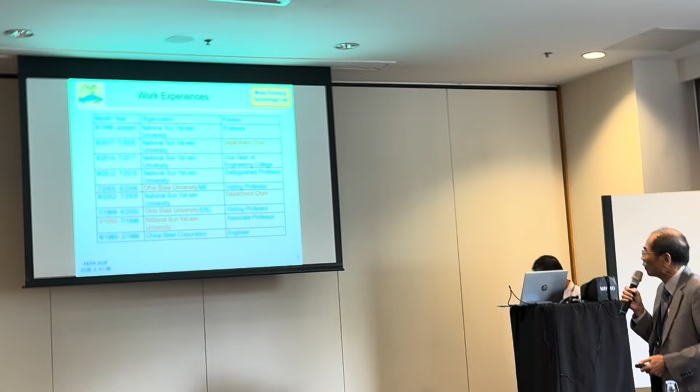About paper publications, I have 180 journal papers published and totally 220 conference papers, about half of which are international conference papers. I also got 32 invention patents or technology transfers, and published 6 books.

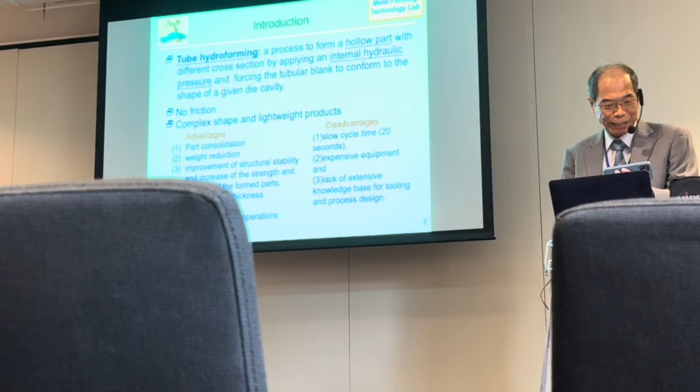What is tube hydroforming? Hydroforming can be defined as a process to conform the hollow part with different cross sections by applying internal hydraulic pressure and forcing the tubular blank to conform to the shape of a given die cavity. Because there is no need for an internal die in the tube hydroforming process, there's no friction at the inner surface of the tube, and complex hollow shapes and lightweight products are its features.

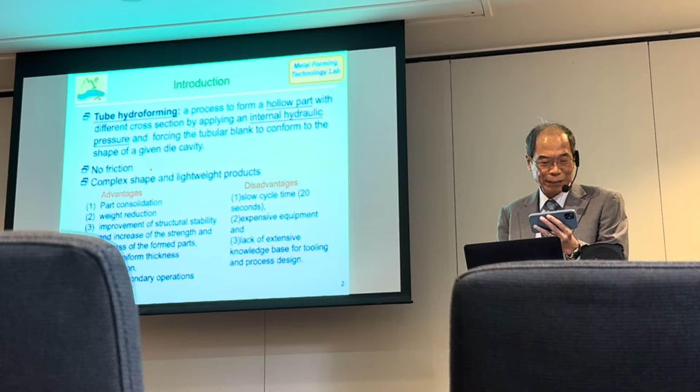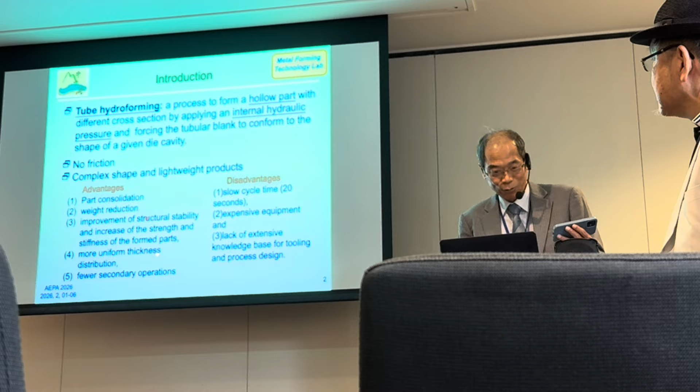Compared to traditional manufacturing via stamping and welding, tube hydroforming offers several advantages, such as part consolidation, weight reduction, improvement of structural stability, increase of strength and stiffness of the formed parts, more uniform thickness distribution, and fewer secondary operations. However, this technology suffers some disadvantages, such as slow cycle time, expensive equipment, and lack of extensive knowledge base for tooling and process design.

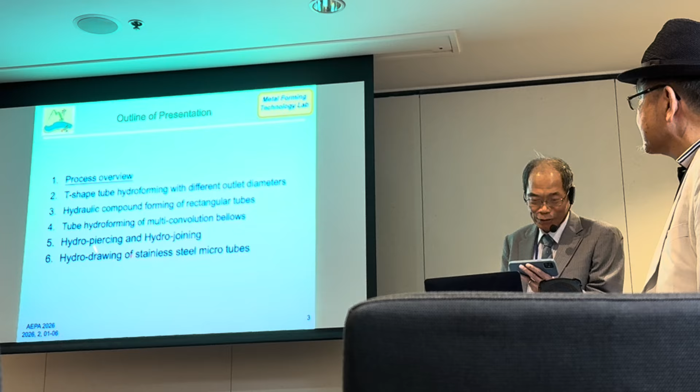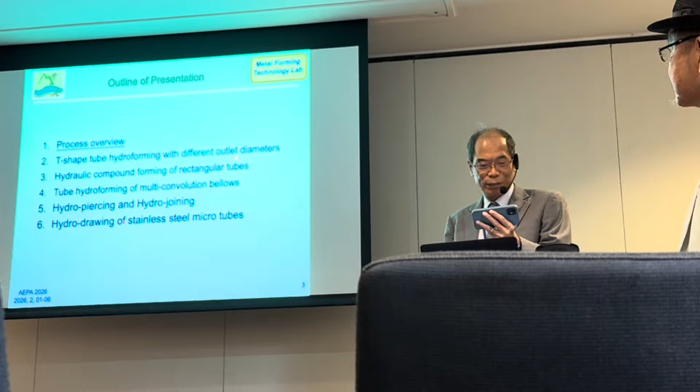In this lecture, 6 topics about applications of tube hydroforming are to be presented. First, a tube hydroforming system is introduced. Second, an adaptive control algorithm is proposed to determine the loading path for T-shape hydroforming processes of products with different outlet diameters. Third, a hydraulic compound forming process, combining conforming, crushing, and hydro bulging, is proposed to manufacture rectangular tubes of aluminum alloy.

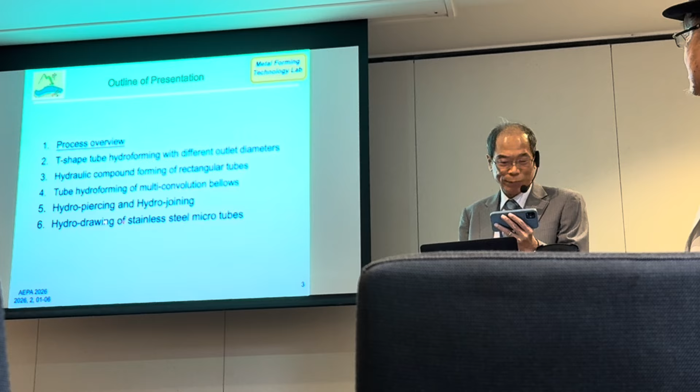The fourth is an application of tube hydroforming to manufacturing of multi-convolution bellows. The fifth is hydro piercing and hydro joining of aluminum alloy tubes. Last, hydro drawing of stainless steel microtubes will be introduced.

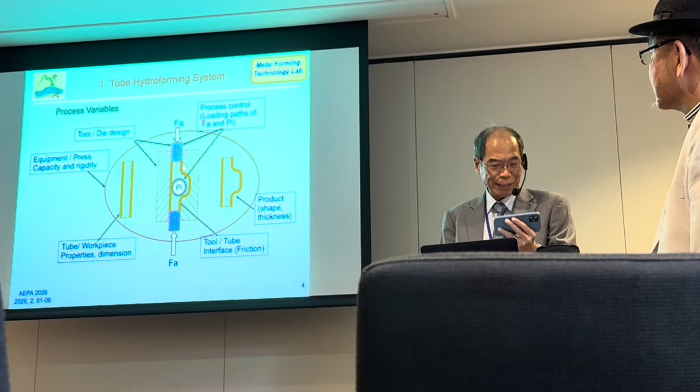A tube hydroforming system generally includes the following subjects: the tube material properties and dimensions, the capacity and rigidity of equipment, the shape and dimensions of the design of the tooling and dies, the loading path design of feeding speed and internal pressurization, the friction coefficient determination at the interface between the tube and the die, and the measurement of dimensions and mechanical properties of the formed products.

My presentation is mainly focused on the design and the loading path design in the tube hydroforming process.

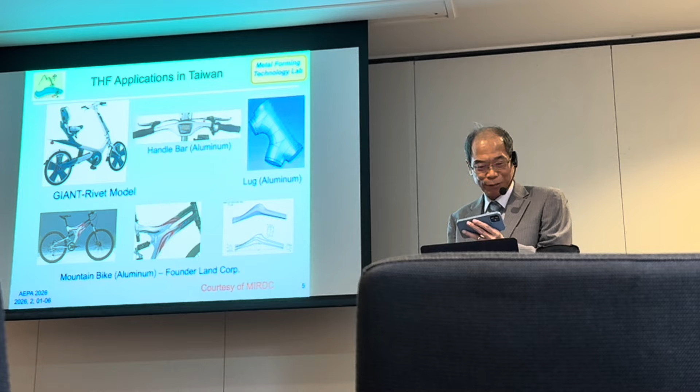In 2003, MIRDC, Metal Industry Research and Development Center, collaborated with Giant Manufacturing Corporation and applied tube hydroforming technology to manufacture bicycle components, such as handlebars, lugs, and supporting branches of aluminum alloys. MIRDC also developed tube hydroforming of bathroom accessories like bellows, lamp structure, and faucet components.

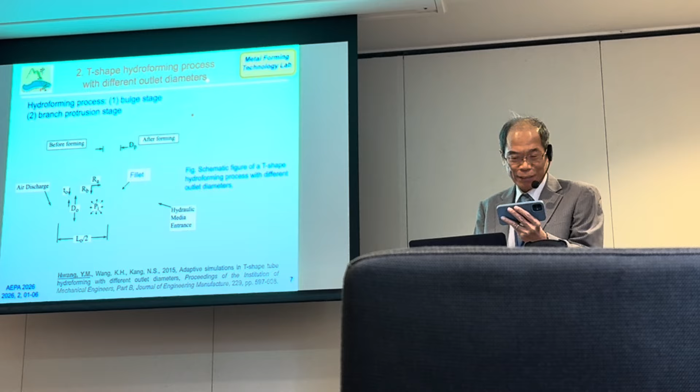The second topic is T-shape hydroforming process for products with different outlet diameters. The contents have been published in Journal of Engineering Manufacture in 2015.

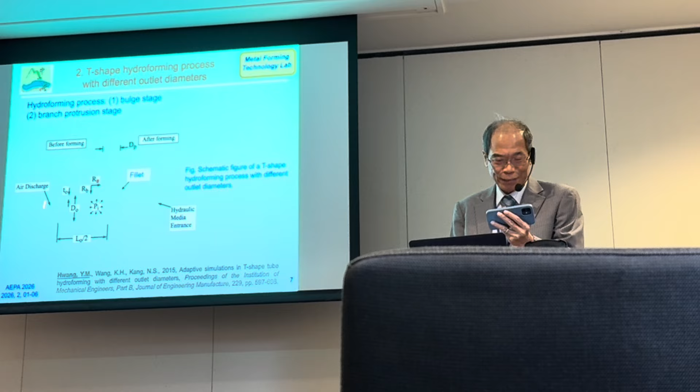This figure shows a schematic diagram of T-shape hydroforming process with the tube diameter D0 and the branch diameter Dp. The surface of the fillet is designed with an elliptical curve of axes Ra and Rb.

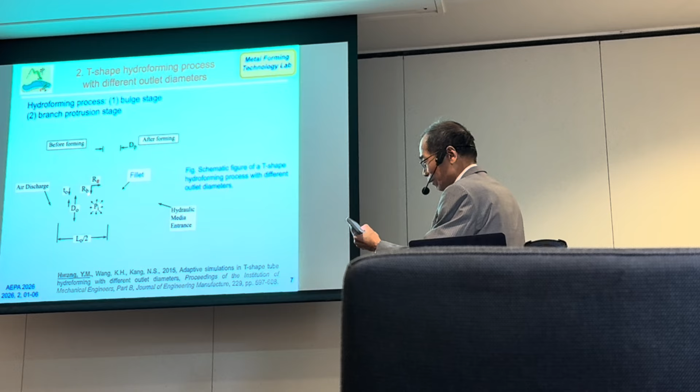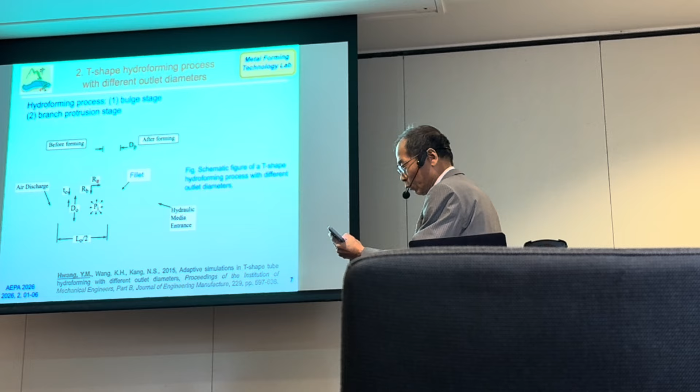The hydroforming process is divided into two phases: bulge stage and branch protrusion stage. In the bulge stage, a hydraulic media is input through an entrance hole to generate a high pressure, Pi, to bulge the tube simultaneously with the action of the two pushing punches, and the counter punch is kept still. In the protrusion stage, the counter punch starts to move backward at a constant speed.

A flow chart for the bulge stage is shown in the right figure. At first, the following parameters such as material property, geometry, internal pressure equipment, axial feeding equipment, and so on are input. At the early bulge stage, the thickness ratio at the top position P is checked. If it is smaller than 90%, the internal pressure is decreased. The axial feeding moves forward by one step, and then the simulation is iterated.

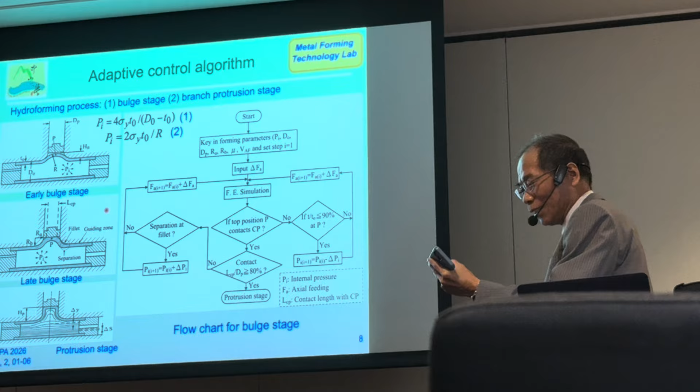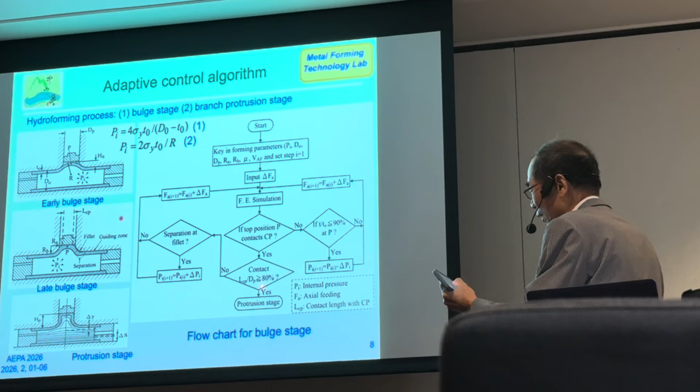Outer P is in contact with the counter punch. The process proceeds to the late bulge stage, and the separation at the die fillet and the wrinkling at the guiding zone are checked. If yes, the internal pressure is increased, the axial feeding moves forward by one step, and then the simulation procedure is iterated. After the contact length ratio reaches 80%, the simulation goes to the branch protrusion stage.

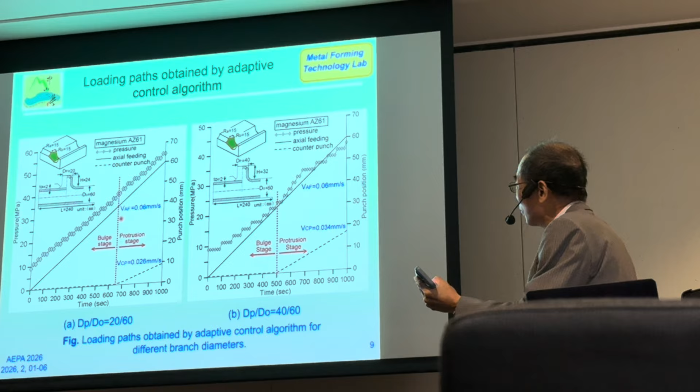This loading path obtained by the adaptive control algorithm for different branch diameters are shown in these figures. The tube diameter is 60 millimeter, the die fillet radius is 15 millimeter. The loading paths are divided into bulge and protrusion stages. The axial feeding speed is set as 0.06 millimeter per second, whereas the counter punch speed is set as 0.026 millimeter per second for branch diameter of 20 millimeter.

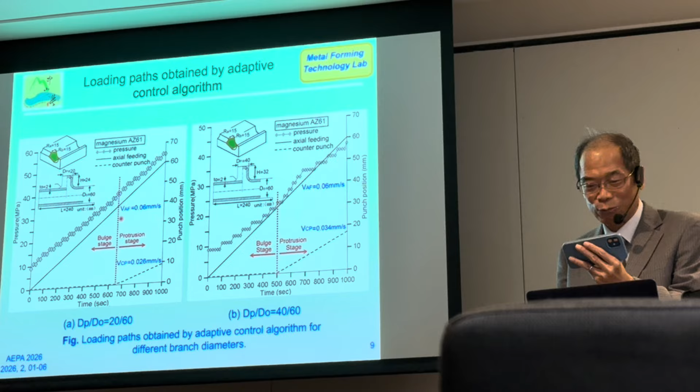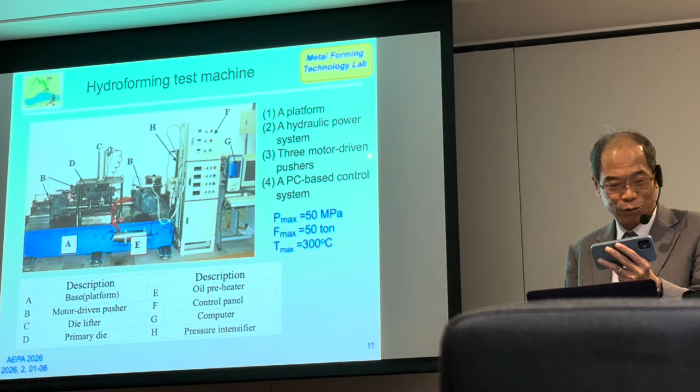Experiments of T-shaped tube hydroforming were conducted using this self-developed hydroforming test machine. This test machine consists of four main parts: a platform for supporting the tooling, a hydraulic power system for providing the pressure source of the internal pressurization, three motor-driven pushers for the axial feeding and the counter punch, and a PC-based control system. This test machine can operate with up to 50 megapascal for the internal pressure, 50 tons for the pushing force, and 300 degrees C for the forming temperature.

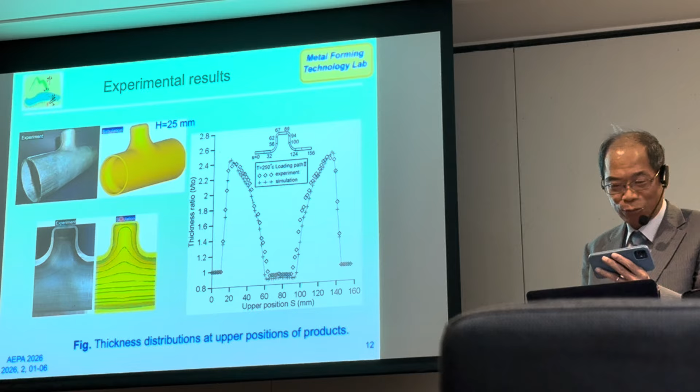Because the actual internal pressure was slightly smaller than the prescribed value, the actual thickness at the top of the branch was slightly larger than the predicted value. Generally speaking, the numerically obtained product shape or profile and the flow line configuration are quite close to those obtained experimentally.

And the third topic is hydraulic compound forming process of rectangular tubes. The paper has been published in International Journal of Advanced Manufacturing Technology in 2016. The compound forming process consists of preforming, crushing, and hydroforming.

The preforming process is used to change the tube shape and make it able to be input into the hydroforming die sets. A circular tube with a diameter D0 and the thickness T0 is preformed by two pressing plates and becomes an oval tube with a short axis W and a long axis H.

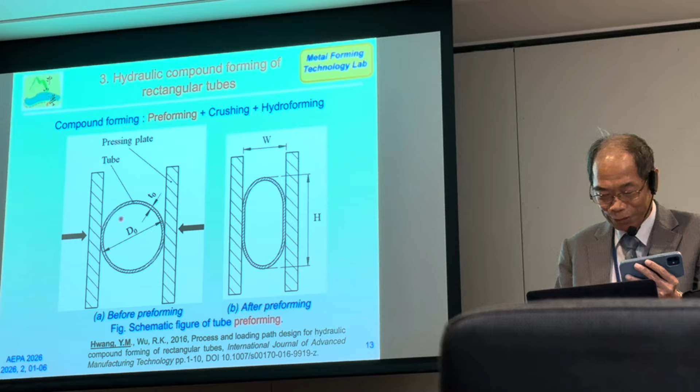At the late stage, the internal pressure is increased to calibrate the tube and make the tube material flow into the corner of the die as much as possible. The pressurization profile is divided into two stages.

At the first stage, a constant small internal pressure PA is input to make the void between the tube and the die as small as possible. At this stage, PA cannot be too large, otherwise the tube would move outward and result in pinching of the tube between the upper and lower dies.

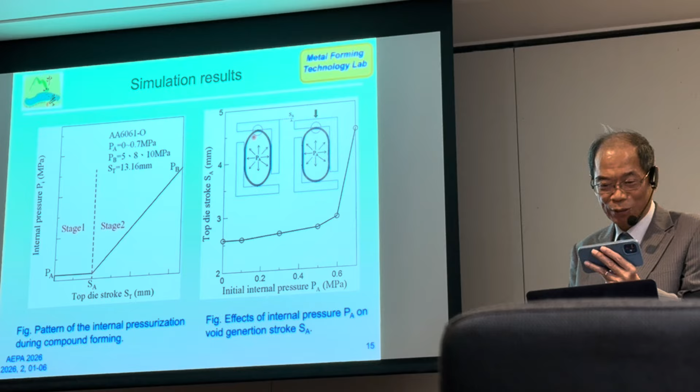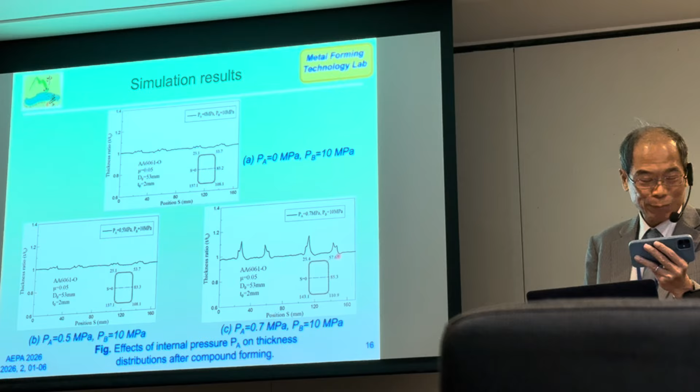When no internal pressure was input into the tube during the compound forming experiment, the tube could not be formed into a rectangular shape. When the final pressure was set as PB equals 5 or 8 megapascal, some product with rectangular shape was obtained.

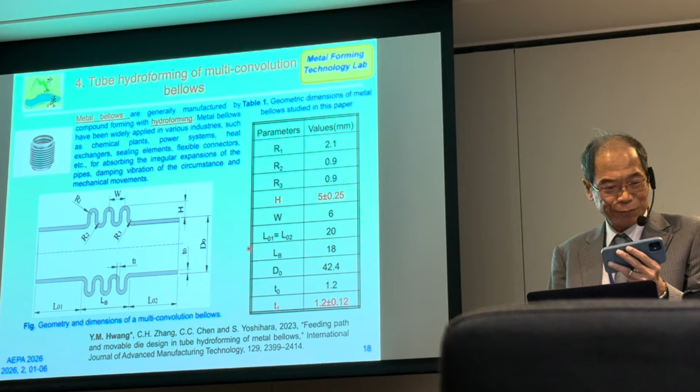The fourth topic is tube hydroforming of multi-convolution bellows. The contents have been published in International Journal of Advanced Manufacturing Technology in 2023.

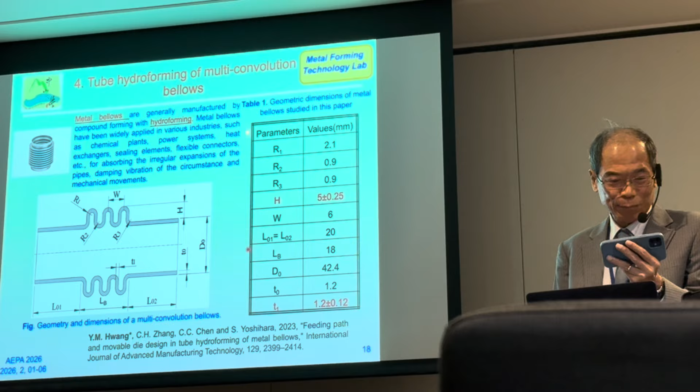Metal bellows are generally manufactured by compound forming with hydroforming. Metal bellows have been widely applied in various industries, such as chemical plant, power system, heat exchangers, sealing elements, and so on, for absorbing the irregular expansions of the pipes, damping vibration of the circumstance and the mechanical movements.

This figure shows the geometry and dimension of multi-convolution bellows, where H is the height, W is the pitch, t1 is the thickness, Lb is the length of the bellows. The arc radius at the top and the bottom of the convolution are R1 and R2 respectively. D0 and t0 are the diameter and thickness of the tube respectively.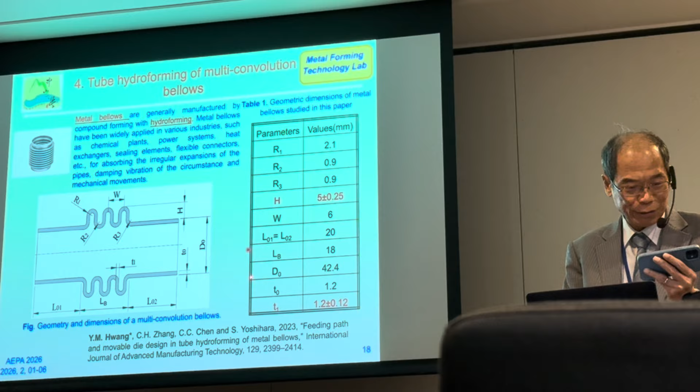The dimensions for each part of the bellows used in the simulation and experiments are given in this table. The acceptable ranges for convolution height and the thickness of the bellows are 5 plus minus 0.25 millimeter and 1.2 plus minus 0.12 millimeter respectively.

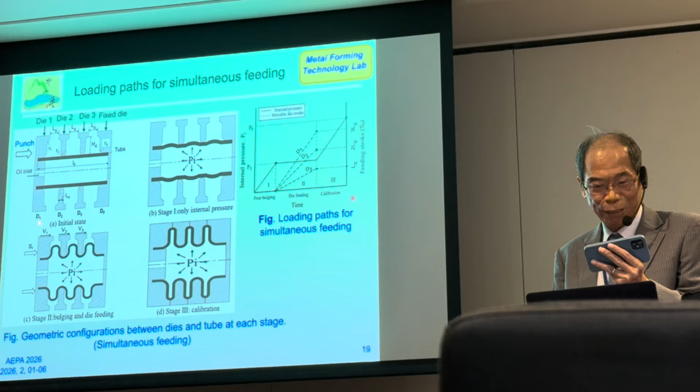This figure shows the geometric configurations between movable dies and the tube in each stage. The loading path for simultaneous feeding type is shown in the right figure. For the movement of the die set, generally the first die D1 is pushed forward by a punch. The second and third dies D2 and D3 are also moved forward simultaneously by the punch through a specially designed mechanism or a spring system.

An orifice was designed at the first movable die to let hydraulic media flow into the tube to bulge the tube. LT is the initial die gap between the movable dies. HD is the die cavity height to prevent the tube from being pinched by the movable dies at the late stage of the process. HD was set at 6 mm.

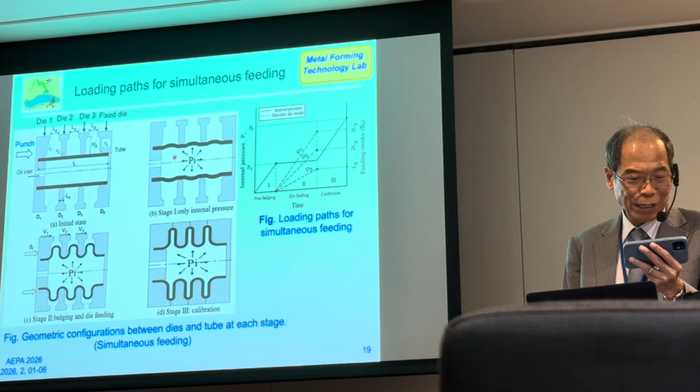At the first stage, only a small internal pressure is applied into the tube to make the tube bulge outward. At the second stage, the three movable dies start to move forward simultaneously to make the tube material flow into the die cavity. At this stage, the internal pressure can be adjusted. At the final stage, the movable dies are closed completely, and if needed, a higher internal pressure is input to make the convolution reach the desired height.

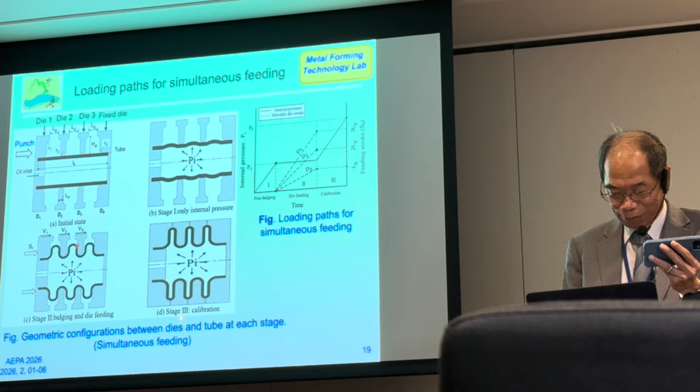The hydroforming process using sequential feeding type is also divided into 3 stages. The geometric configuration between the movable dies and the tube, the initial state and the first stage, are the same as those using the simultaneous feeding type.

At the second stage, the first movable die D1 starts to move forward to complete the formation of the first convolution. Then the first and second movable dies move together to complete the formation of the second convolution. And finally, all 3 movable dies move together to complete the formation of the third convolution.

At this stage, dies 2 and 3 are moved passively and pushed forward by die 1. So the formation of the convolutions is completed sequentially, not simultaneously.

A commercial finite element software was used to simulate the hydroforming process. The tube material used was stainless steel 304. An isotropic elastoplastic material model was set for the tube material, and tensile tests were conducted to obtain the flow stress of the tube material.

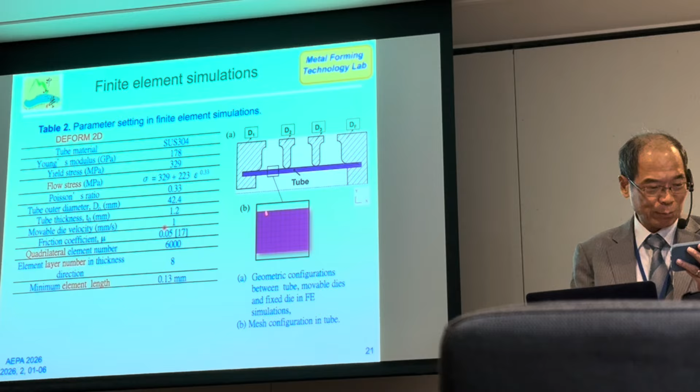Totally about 6,000 quadrilateral elements were set for the tube. The minimum element length is about 0.13 millimeter, with 8 element layers in the thickness direction of the tube. The mesh configuration in the tube and the geometric configurations between the tube, movable die, and fixed die before hydroforming are shown in the right figure.

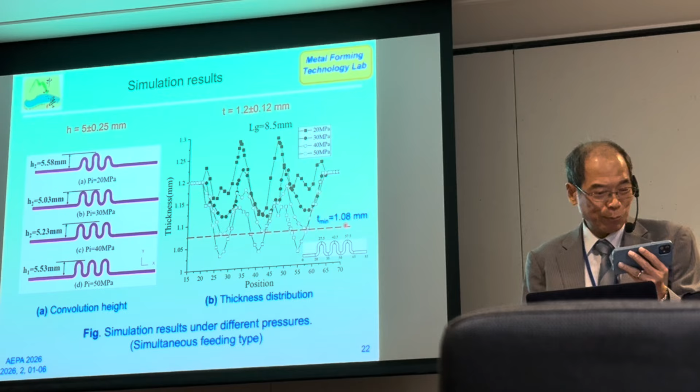The minimum thickness for internal pressure of 50 MPa is smaller than the minimum requirement of 1.08 millimeter.

This figure shows the effect of internal pressure on the average convolution height and the minimum thickness using simultaneous feeding type. The average convolution height increases with internal pressure, whereas the minimum thickness decreases with internal pressure. For internal pressure equals 30 and 40 MPa, the average convolution height is located at the acceptable region and the minimum thickness is larger than the acceptable minimum value.

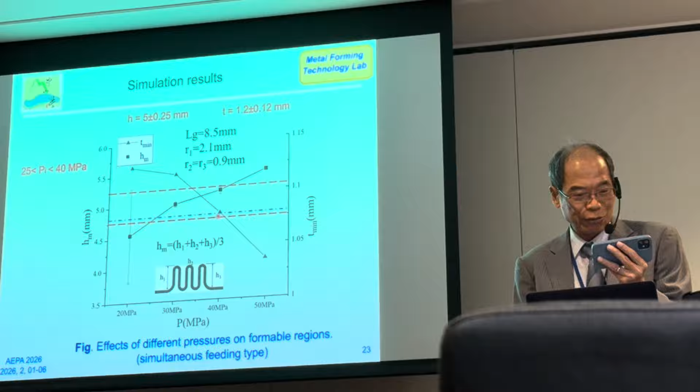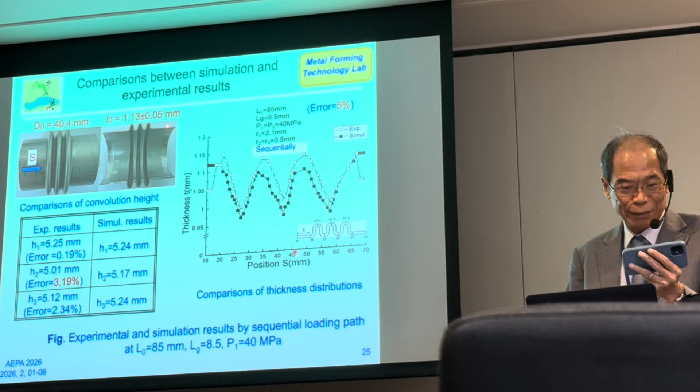The thinnest position occurred at the welding line. After experiments, the hydroformed bellows were cut into two halves in the longitudinal direction using electric discharge wire cutting for measuring the thickness distribution of the formed bellows.

The comparisons of the convolution height and thickness distributions between simulation and experiments are shown in this table and this figure respectively. The maximum errors for the convolution height and the thickness between simulation and experiment are about 3% and 5% respectively.

The fifth topic to talk about is hydro-piercing and hydro-joining. The contents have been published in the journal Materials in 2025. This study proposed a novel tube hydro-joining process which combined piercing, hole flanging, and nut inlaying.

The nut punch shape design proposed by this paper can deliver three advantages: no scrap, no oil leakage, and a longer flange length, which can achieve stronger clamping force and accordingly increase the pull-out force.

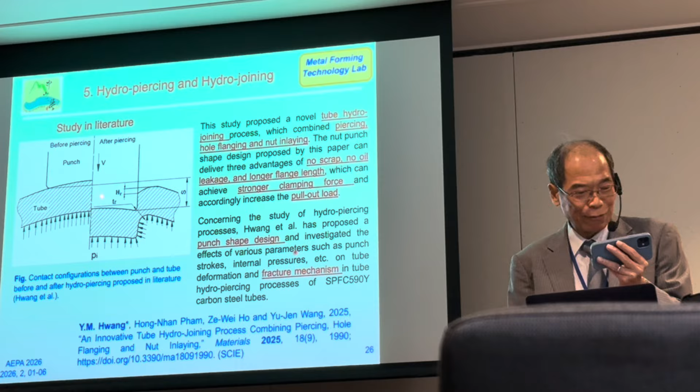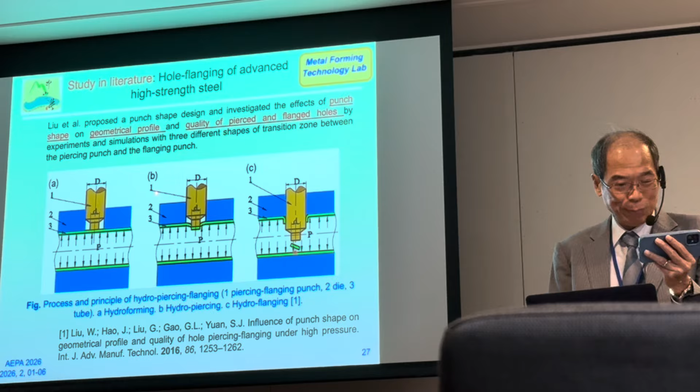Liu et al. proposed a punch shape design and investigated the effects of punch shape on the geometric profile and quality of pierced and flanged holes by experiments and simulations, with three different shapes of the transition zone between the piercing punch and the flanging punch.

Concerning the hydro-joining process, Mizumura et al. proposed a compound process combining hydro-burring and nut inlaying with a designed punch shape, as shown in these figures. However, with this method, the pierced scraps may result in blocking of the oil pipe and cause fluid flow problems. On the other hand, oil leakage around the punch surface may occur in hydro-piercing and hydro-burring process, which leads to a pressure drop of the internal pressure.

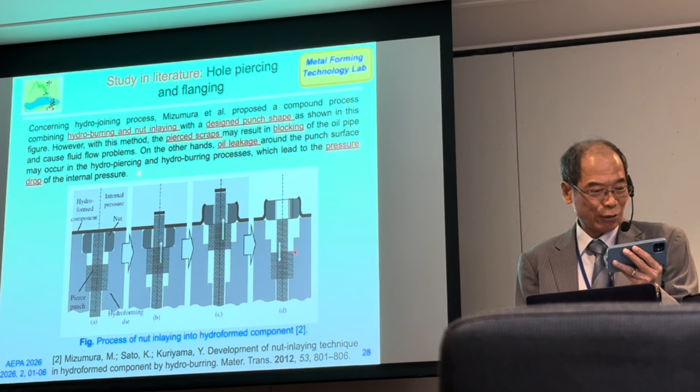In this paper, the novel hydro-joining process combining piercing, flanging, and inlaying was proposed. The punch nut shape design proposed by this paper can deliver three advantages of no scrap, no oil leakage, and longer flange length. The hydrojoining process comprises 5 stages.

At stage 1, internal pressure was applied to expand the tube into the desired shape, establishing internal support. In stage 2, the punch-shaped nut moved downward to flange the aluminum alloy.

In stage 3, the internal pressure was released to enable sufficient tube material elastic recovery during the inlaying stage and ensure adequate clamping force. In stage 4, the punch continued to move downward, inlaying the punch-shaped nut. Finally, in stage 5, the punch was retracted upward, leaving the nut in place.

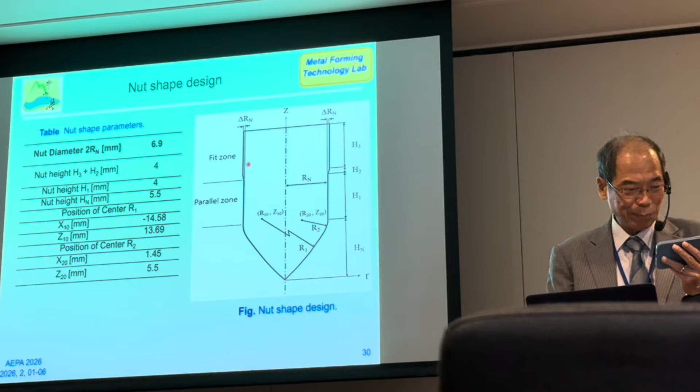So, to prevent fluid leakage from the hole, the fit zone is designed to enhance the clamping force during the inlaying stage. Detailed nut shape parameters are listed in the left table.

An implicit and static finite element code, DEFORM-3D, was applied to analyze the elastoplastic deformation pattern of an aluminum alloy tube during the hydrojoining process. The punch and the die were regarded as rigid bodies, and the tube is elastoplastic.

The normalized Cockcroft-Latham fracture criteria was used to predict if the tube is pierced through by the nut or not in the hydrojoining process. The critical damage value for aluminum 6063 was set as 1.42 from literature.

Due to symmetry on the left, right, and front-back sides, only 1/4 of the object was adopted in the simulations to save simulation time. This 1/4 of the tube is divided into 3 zones, which have different element size ratios, set as 0.2, 0.4, and 1 for zones 1, 2, and 3 respectively.

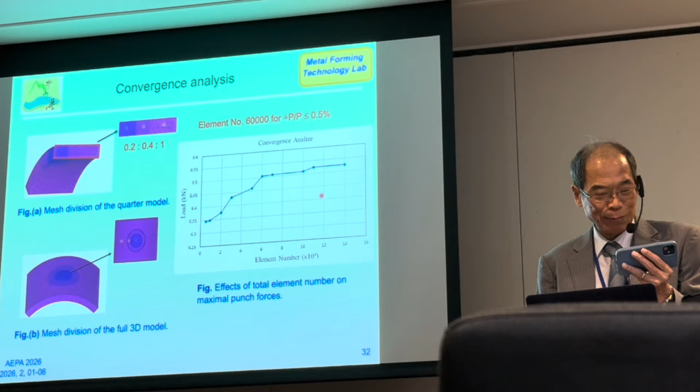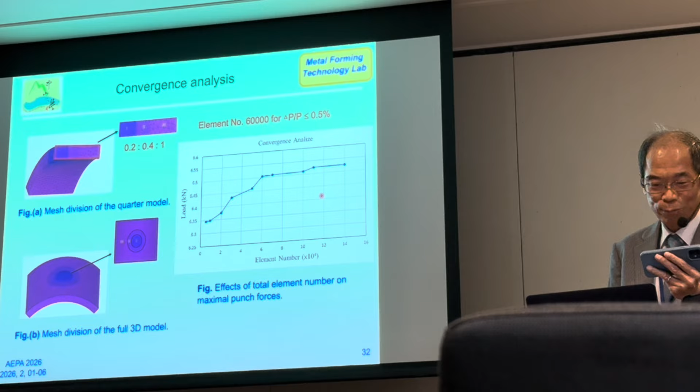Convergence analysis was implemented to determine an appropriate element number for saving simulation time with acceptable simulation result error. As the total element number increases to 60,000 elements, the relative difference in the maximum punch force decreases to within 0.5%. Accordingly, approximately 60,000 tetrahedron elements with a minimum element size of 0.2 millimeter was set for the tube object in the following finite element simulations.

To investigate the effects of the geometric parameters of the nut fit zone on the pulling out force during the hydrojoining of aluminum 6063 tubes, simulations were conducted using various internal pressures, fit zone height, and nut diameter to explore the effects of tapered loading paths under different slopes.

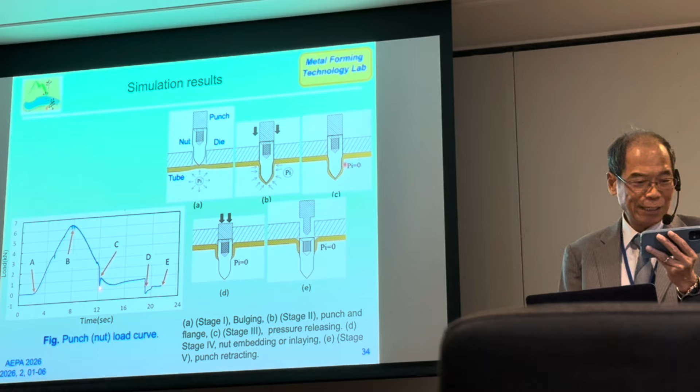At this stage, the nut temporarily ceased its downward motion, and the release of material and internal pressure resulted in a sharp decline in the load. After that, the nut resumed its downward motion to begin inlaying. Finally, at point D, the punch began to withdraw until point E, using a reversed load shown with a negative value.

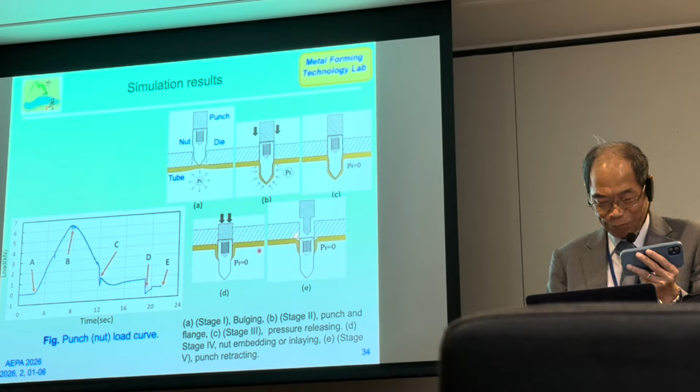For hydrojoining experiments, a custom designed upper and lower die set was employed to integrate the hydraulic system, servo press, load cell, and tube holding sleeve.

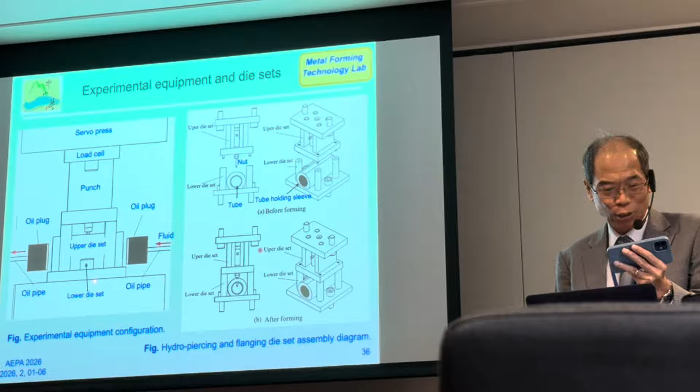The upper die set served as the punch mechanism for driving the nut downward. The lower die set was used to secure the tube, connecting to the hydraulic pipe and positioning the upper die set. Before the experiment, the tube was pressed into the tube holding sleeve at the lower die set.

The hydraulic system delivered hydraulic fluid through oil pipe and plugs into the tube inside the tube holding sleeve at the lower die set. Based on simulation results, hydrojoining experiments were conducted with a fit zone height of 7 millimeter and a nut diameter of 7 millimeter, with hydraulic pressures of 30 megapascal and 50 megapascal.

The tube material used was annealed aluminum 6063 with a length, diameter, and thickness of 83, 50.8, and 3 millimeter respectively, to fit the die dimension. The right figure shows the loading path between punch stroke and internal pressure during the experiments.

The curves in this figure indicate that the experimental loading paths were consistent with those in the simulations. Because the servo press was manually operated during the experiments, the loading paths exhibited some delays with respect to the simulated loading path.

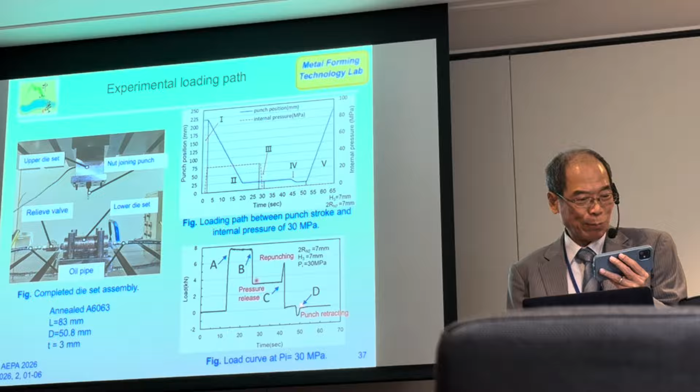In the load figure, Point A represents the maximum load induced by the downward movement of the nut and the internal hydraulic pressure. Point B represents the load reduction after the hydraulic pressure is released. Point C represents nut repunching during the inlaying stage. Point D corresponds to the maximum pulling out force as the punch retracted or moved backward, appearing with a negative value.

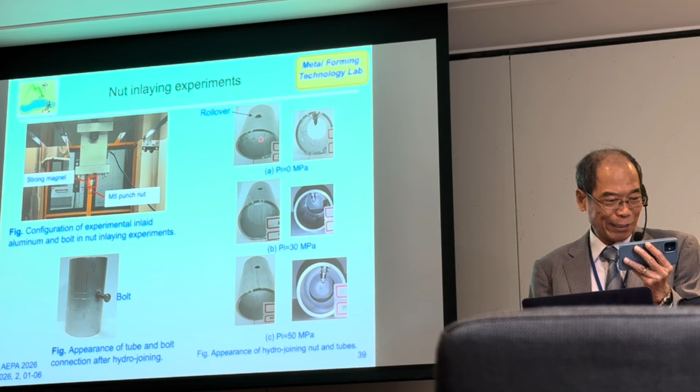For no internal pressure, a noticeable rollover was present on the surface. At 30 MPa, a slight, nearly invisible rollover was present. At 50 MPa, the surface was completely flat, indicating optimal homogeneity.

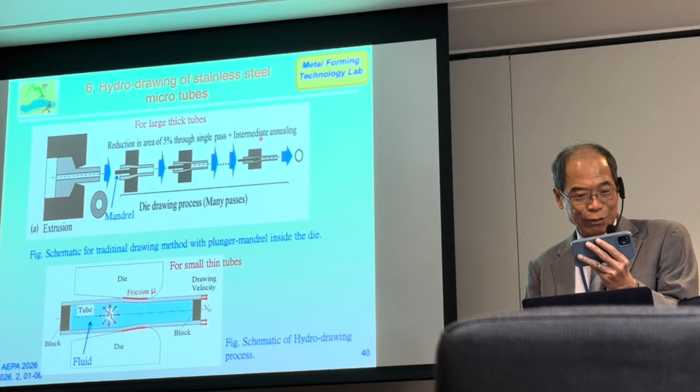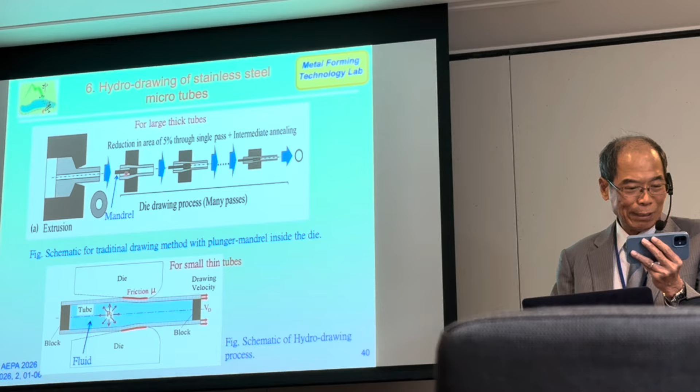The 6th topic to talk about is hydro drawing of stainless steel microtubes. In traditional drawing processes, a plunger mandrel is used to control or constrain the inner diameter of the drawn tube. However, for a continuous multi-pass microtube drawing process, it is difficult to insert a plunger mandrel into the microtube. Among available techniques, fluid mandrel drawing, or hydro drawing, is an alternatively effective method for manufacturing long thin wall tubes, because this method allows the internal fluid to be easily removed by trimming the oil sealed ends after the hydro drawing process.

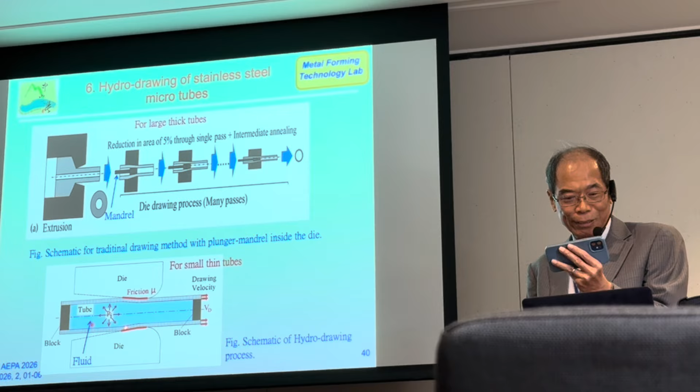A commercial finite element software, Deform 2D, was used to simulate the hydro drawing process. The tube material used was stainless steel 304. An isotropic elastoplastic material model was set for the tube material. Tension tests were conducted to obtain the flow stress of the tube material.

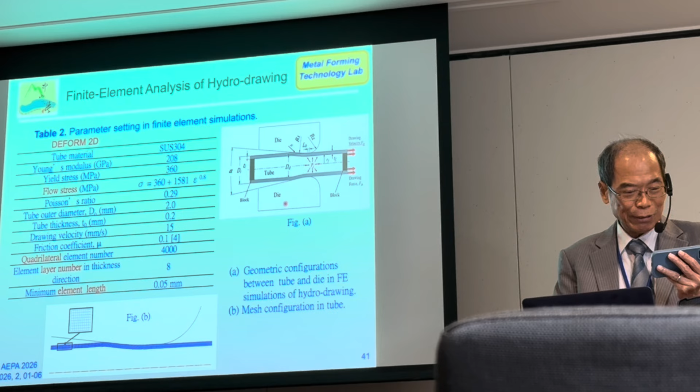A total of about 4,000 quadrilateral elements were set for the tube. The minimum element length is about 0.05 millimeter. There are 8 element layers in the radial direction of the tube. The mesh configuration in the tube, the geometric configurations between the tube and the die, and the drawing force during the hydro drawing process are shown in these figures.

This study used the Taguchi method with finite element simulation to appropriately determine the forming parameters and die geometric dimensions in the hydro drawing process. In the microtube hydro drawing process, drawing stress, shown in figure 1 equation 1, and the wall sinking ratio, shown in equation 2, are considered as two performance indexes or objectives.

Drawing stress is directly associated with process feasibility. When the drawing stress is too large, the drawn tube is prone to necking or even breaking. Therefore, confining the drawing stress below the ultimate tensile strength is essential in forming parameter and die dimension design.

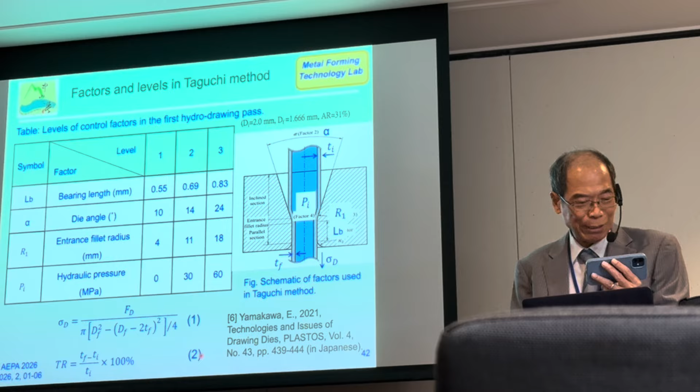The wall sinking ratio is the index for evaluating the quality of the drawn product. Minimizing the sinking ratio is also essential in the forming parameters and die dimension design. In the Taguchi analysis of the hydro drawing process, the smaller-the-better principle was used for the two indexes.

Among the forming parameters, the die bearing length, the die angle, the entrance fillet radius, and the internal pressure PI were selected as the control factors. The levels for each control factor were set according to literature reference 6. The 4 control factors and their corresponding 3 levels used in the first drawing pass are summarized in this table.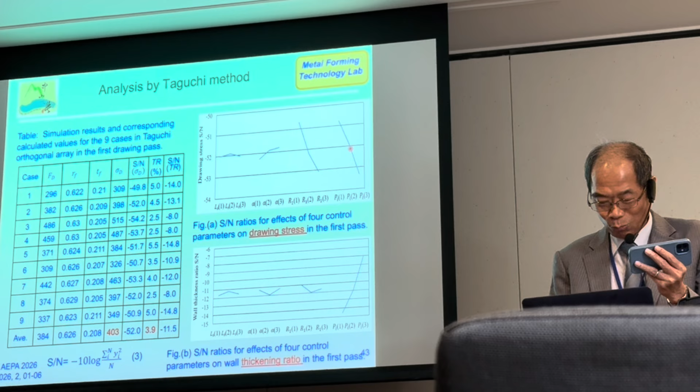The selected levels for each control factor in the first drawing pass are summarized in this table. The finite element simulation of the micro-tube hydrodrawing process was conducted again using these selected levels.

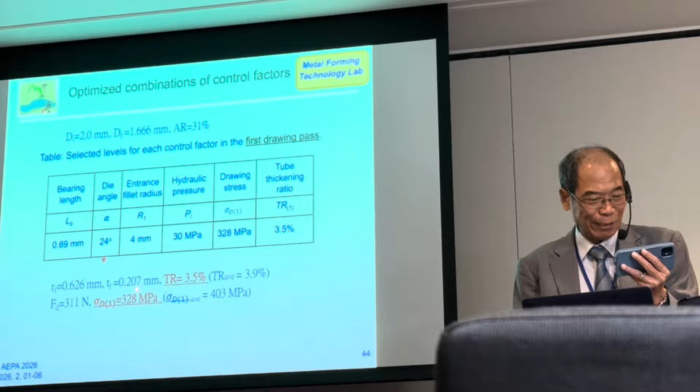The simulated inner radius of the drawn tube is 0.626 millimeter, and the inner thickness is 0.207 millimeter. That is, the minimized thickening ratio is 3.5%, about 0.4% lower than the average value from the 9 cases used in the Taguchi analysis. The simulated drawing force is 311 Newton. The minimized drawing stress is 328 megapascal, about 16% lower than the average value from the 9 cases in the Taguchi analysis. The mechanical properties of the drawn tube after the first drawing pass were subsequently used as the tube material property in the second drawing pass.

The selected levels for each control factor in the second drawing pass are shown in this table.

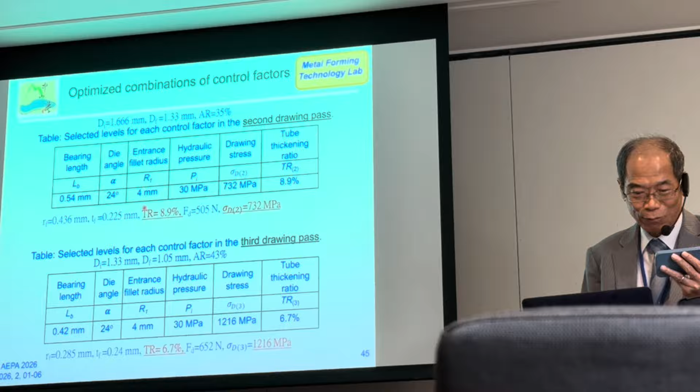The simulated inner radius is 0.436 millimeter. That is, the minimized thickening ratio is 8.9%. The simulated drawing force is 505 Newton, and the minimized drawing stress is 732 megapascal.

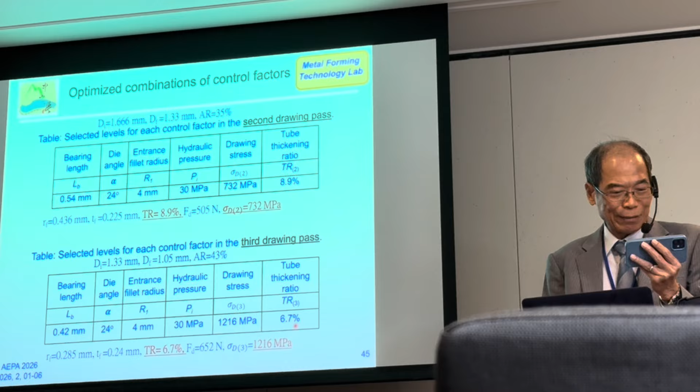In a similar manner, in the third drawing pass, the minimized thickening ratio and drawing stress are 6.7% and 1,216 megapascal respectively. This is because of the strain hardening effect, and the drawing stress needed in the third drawing pass is much larger than that needed in the first drawing pass.

2 oil sealing mechanisms inside the tube, at the rear end and front end, are shown in these figures. This oil sealing mechanism was designed for applications under medium to high pressure. In the mechanism, an oil sealing punch is inserted into a clamp holder and combines with an oil seal retaining plate to ensure no hydraulic oil leakage during the hydrodrawing process.

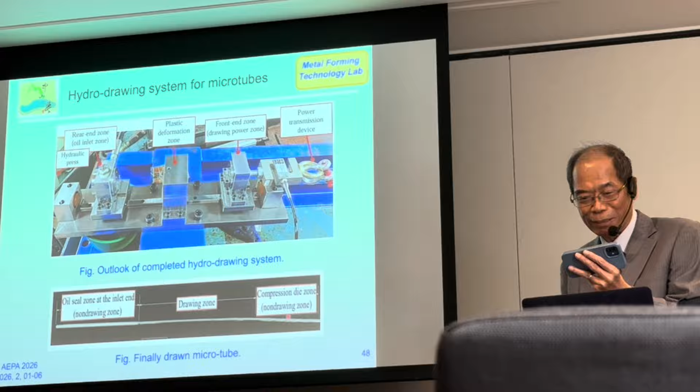This figure shows the outlook of the completed hydrodrawing system. Before hydrodrawing, the tube front end has to be compressed by a specially designed die set to reduce its diameter from 2.0 to 1.6 millimeter for passing through the drawing die hole of 1.66 millimeter in diameter. The middle section is the part that was drawn through the die hole, eventually reaching a diameter of 1.66 millimeter.

In the hydrodrawing experiments, for the first drawing pass, the internal pressure was set as 30 megapascal and the die dimension was as shown here, which were not the optimized values from the Taguchi analysis, because of difficulty in machining the die made of tungsten carbide. This figure shows the drawing force variations during the hydrodrawing experiments and simulations in the first drawing pass.

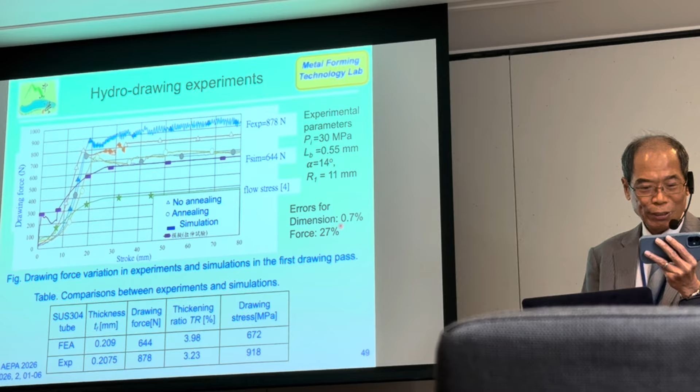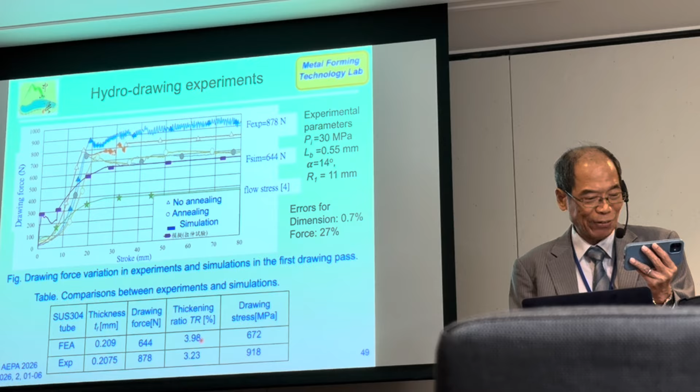The difference between the simulated and experimental drawing force is about 27%, which is probably caused by the assumed friction coefficient and the strain hardening of the stainless steel used. The deviation between the simulated and experimental final thickness is less than 0.002 millimeter. The simulated thickening ratio of 3.98% is quite close to the experimental value of 3.23%.

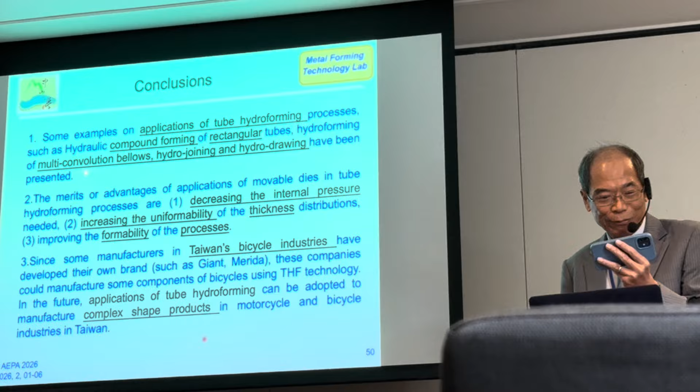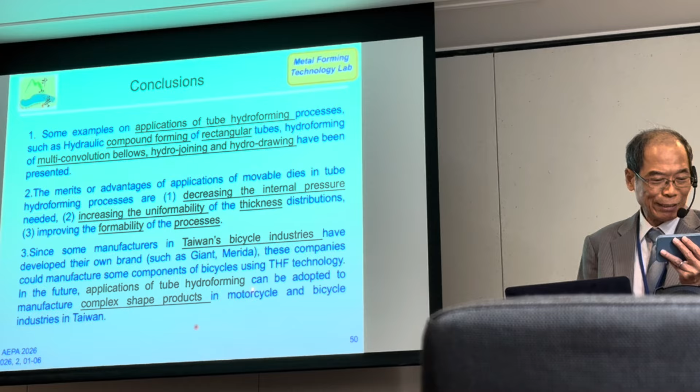Finally, some conclusions can be drawn. Examples of applications of the tube hydroforming process, such as hydraulic compound forming of rectangular tube, hydroforming of multi-convolution bellows, hydrojoining, and hydrodrawing, have been presented. The merits of applying movable dies in the tube hydroforming process are decreasing the internal pressure needed, increasing the uniformity of thickness distribution, and improving the formability of the process. Since some manufacturers in Taiwan's bicycle industry, such as Giant and Merida, have developed their own brands, these companies could manufacture bicycle components using tube hydroforming technology. In the future, applications of tube hydroforming can be adopted to manufacture complex shaped products in the motorcycle and bicycle industries in Taiwan.

Thank you very much for your kind attention.

At this stage, we can manufacture about 1.0 millimeter diameter, and thickness about 0.2 millimeter. At this stage. But in the future, we hope we can reach 0.5 millimeter, about one half of the current size. But there are many challenges, because it's very small.

So how to obtain the material property is another issue, because usually we use a tensile test, but how to design the clamp is another issue. And material size uniformity is also another issue. So usually we buy the tube material from Japan, because Japan has very high quality material.

Thank you. Okay. Any comments or any questions?

Every year I check my supervisor's projects. Every year he has four projects, which is very difficult in Taiwan. So why do I check his projects? Because I watch all his topics. If he is doing something, I don't do that same thing. I need to escape from his topic because I cannot touch his topic, he is very excellent. If I still did the same topic, I cannot get the project, so I need to find another topic. So every year I can still get topics, but just two, while he can get four. So he is very excellent.

And any question? Yeah, okay, please. I have one question, but not related to the technology.